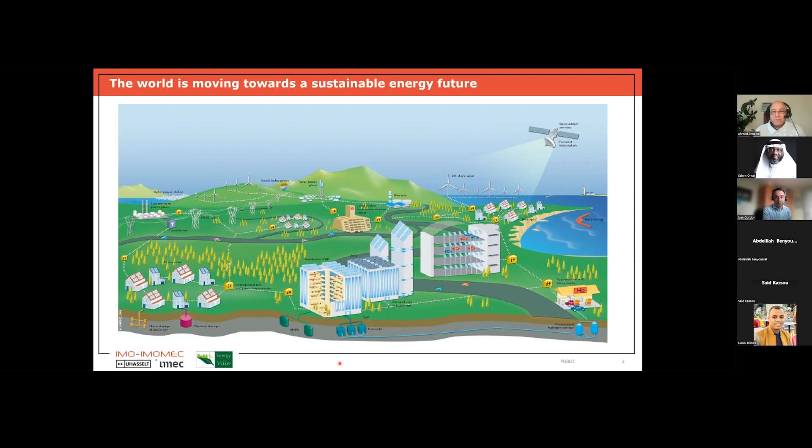Why is it happening now? Well, this transition, which is ongoing, is really happening at the moment because of the cost, which has decreased substantially over the last years and decades. If we look at photovoltaic solar energy, I show here a curve, a so-called learning curve of silicon photovoltaics. It shows you, with data starting in 1976, the evolution of the cost or price of PV modules.

The data starts in 1976. So if in the late 70s you wanted to buy PV modules, you would have to pay $100 per watt of these modules. It's a very large cost. For instance, if you had a 3 kilowatt system, 3000 watts of modules, you would have to pay $300,000. It's really huge.

Luckily today, of course, the situation is completely different. Today, the average cost for a PV module is only 23 cents per watt peak on average. That means there is a difference of almost a factor of 1,000 between 45 years ago and now.

As a result of that, what we see is that the amount of PV modules being produced each year and installed worldwide is also increasing very rapidly. In 2022, we installed worldwide in one year's time roughly 250,000 megawatts, so 250 gigawatts of PV modules. That's of course driven by the cost, and these large volumes and the cost reduction go hand in hand.

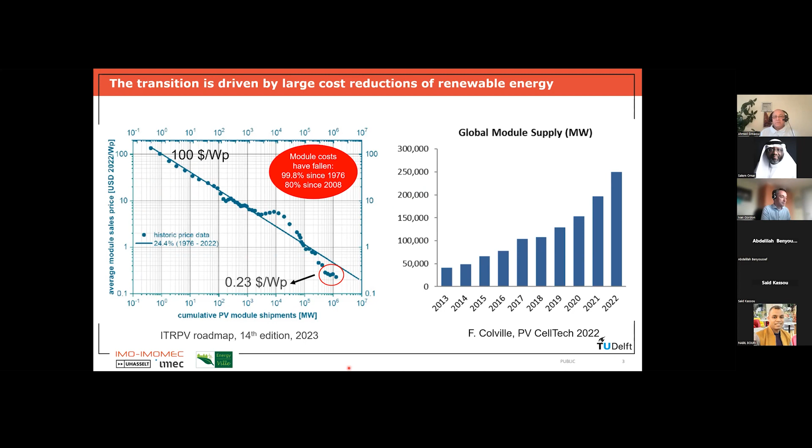What we want to achieve is to collect the electrons and holes at different sides of the device. We have two polarities in the device, an N polarity and a P polarity, negative and positive. In the best case, the electron hole pairs generated by the absorbed light are collected at these two contacts. This way, an electrical current flows and we get a voltage, so we get power - basically we convert directly the sunlight into electricity.

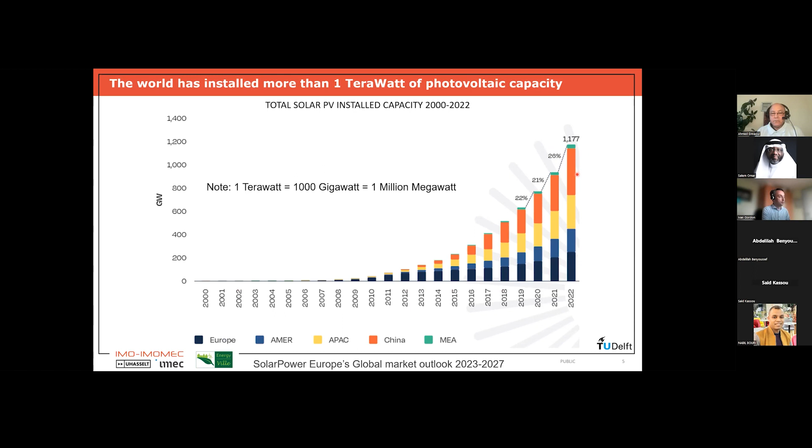If you look at the technology behind these PV modules, most are actually based on what we call crystalline silicon technology, and that will be the focus of my talk. You see in dark blue and light blue the share of silicon technology in PV modules - this is really dominating and has dominated over the years. Currently around 95% of PV modules produced and sold are based on crystalline silicon, and only 5% is based on something else, which we call in general thin film photovoltaics.

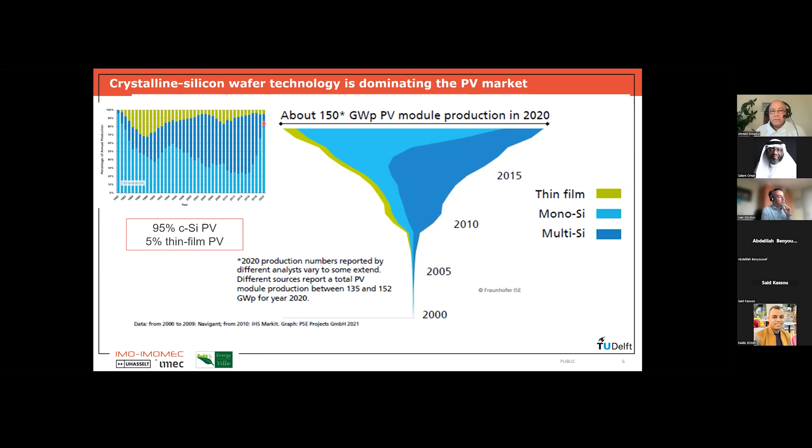This situation has evolved over time, but more or less silicon PV has always dominated. I will explain step by step what is going on in crystalline silicon photovoltaics in the remainder of the talk. I will not focus on thin film PV, but I will say a few words about it now.

If you look at the 5% of PV panels not based on crystalline silicon, they are based on different materials out there. But most thin film PV panels at the moment are based on the material cadmium telluride, a compound semiconductor. It's mostly produced in the United States by one single company called First Solar, and this technology is also quite successful. But it's based on two elements - cadmium, which is toxic, and especially tellurium, which is a quite scarce element.

That's probably also the reason why cadmium telluride will never be able to be produced in the same amounts as silicon, because it's actually quite scarce.

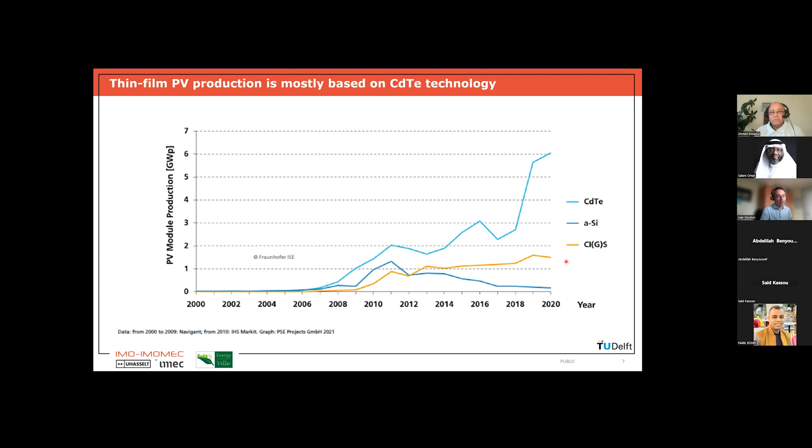Then there are some other technologies in the market. We have technologies based on amorphous silicon, but that's not really produced so much anymore because the efficiencies are too low. You also have a technology based on copper indium gallium diselenide, where several companies are still producing it today. And then there is a new upcoming technology called perovskites, which I will also discuss later in my presentation. But in this presentation, I really focus on the mainstream technology, which is crystalline silicon photovoltaics.

When we talk about crystalline silicon photovoltaics, we actually mean PV panels based on the use of crystalline silicon wafers as the absorber material.

If we look at the value chain of crystalline silicon, how we start from sand, which contains silicon, and produce a silicon PV panel, we can roughly distinguish 5 steps, which are listed here and which I will explain in the following parts.

So the first step is actually to go from sand, which contains silicon but is impure, to having very pure crystalline silicon. That's the first step. We make polysilicon, so these are, let's say, chunks of very pure crystalline silicon that we have.

In a second step, these chunks are molten and recrystallized in the form of ingots. These ingots are simply very large and heavy blocks of very pure crystalline silicon material. These ingots are then sawn into individual wafers. The individual wafers are processed into individual silicon solar cells. And then finally, these individual silicon solar cells are interconnected and laminated into the silicon PV module.

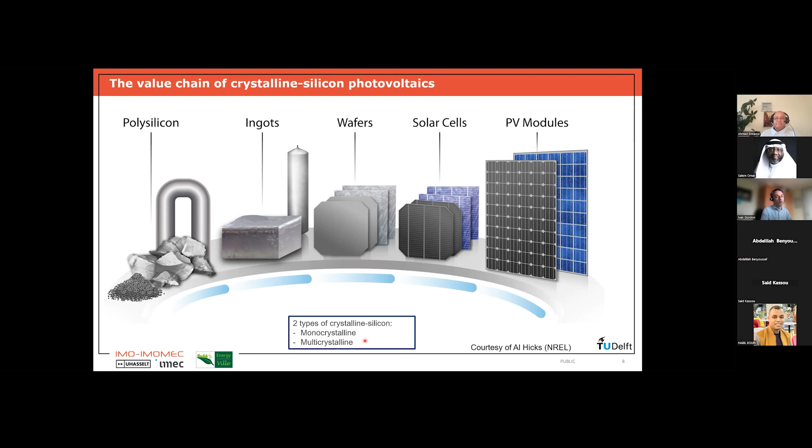But we also in the past were using so-called multicrystalline silicon wafers. These are wafers where the wafer has different crystallographic orientations, meaning you have different grains of different orientations, some grain boundaries, and typically more defects in this material. But it was used a lot in the past because we could make these multicrystalline silicon wafers cheaper than monocrystalline silicon wafers, so it made sense to use those. But I will show later that at this moment, almost no multicrystalline silicon is used anymore.

So then we can have a look at the cost structure of these modules. I mentioned in the beginning that at the moment, if you buy a silicon PV module, on average it will cost you 23 cents per watt peak. So where does the 23 cents come from?

Then another 40% is coming from the module processing, to make the module, and especially from the module materials, like the encapsulation, the glass, the backsheet. And only less than 20% of the cost is actually related to the cell processing. So we can say that the module cost is really dominated by material costs for the polysilicon especially, and also for the module level materials that we are using.

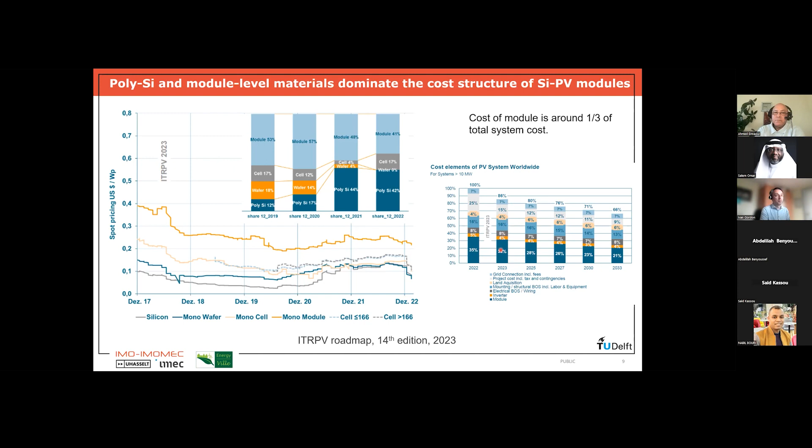Here the prediction, the dark blue, which is the percentage of the total cost of the system that is in the modules, is that it will even further decrease to below 25%. This is very important because typically the balance of system cost scales inversely with the efficiency of the modules. So if you have higher efficiency for your PV modules, then relatively speaking, the balance of system cost will be lower. The fact that the balance of system cost is dominating the total cost means there is a big pressure for using as high efficiency modules as possible to reduce the total system cost.

Now I have a few slides where I will show some important things that we now have to investigate in research and development for silicon photovoltaic. In the past years and decades, most research and development for silicon PV was focused on further increasing the efficiency of the devices and lowering the cost. And that, of course, still stays important.

But at present, we can already say that solar electricity is the cheapest electricity out there. So we already are doing very well. We can further improve it, but it's not the only thing on which we should focus anymore.

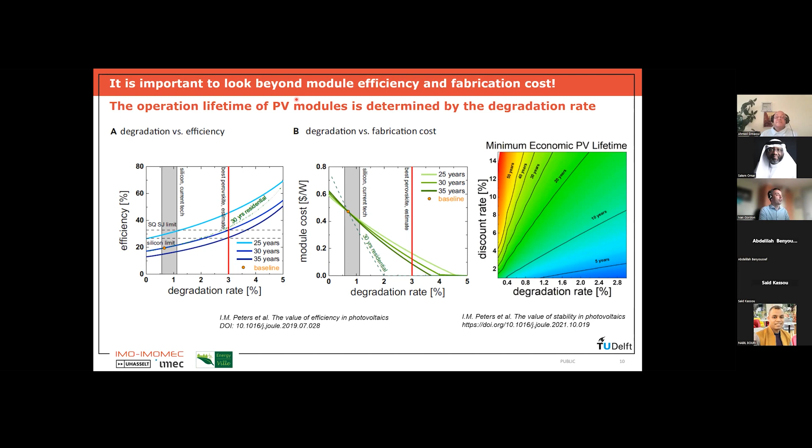So what is also important, first of all, is that we try to increase the operation lifetime of the modules further. Currently, if you buy a PV system, you typically get a 20 or 25 year operational lifetime warranty. But we probably need to further increase this to 30 to 40 years even. And each PV module that you install will have a certain degradation year after year, so it's very important to minimize the degradation rate.

This is becoming a very important field of study, especially because PV modules are used everywhere in the world under completely different climatic conditions. So if you use the same PV module in Belgium, where I'm now at, or you use it in Morocco, for instance, it will see a completely different climate during its lifetime. So you really have to tune the technology for the location and the application that you use it for.

Then secondly, we really have to focus on sustainable manufacturing. This will come back later in my story, because we will need to install a huge amount of PV modules in the coming decades. And of course, at some point all these modules will become too old and we will stop using them. So then also we need to be able to, first of all, recycle them.

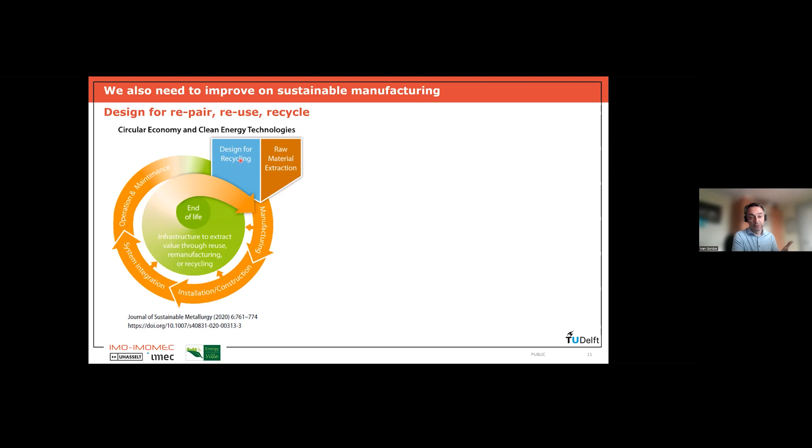We can already recycle PV modules, but we can still make a lot of progress there if we also really design the PV modules from the start for easy recyclability. Secondly, when we talk about sustainable manufacturing, we should also look at how much energy we need to produce the modules and how much greenhouse gas emissions we are making. Because again, we're going to have to produce a huge amount of these PV modules. So if we can reduce even by a few percent the greenhouse gas emission, it can have a huge impact.

Now, where does most of the energy come from, or where is most of the energy needed for? That's again actually in making the polysilicon and the wafers. We already saw before that the silicon material itself represents 40% of the module cost. But if we look at the energy demand for making a silicon PV module, we see that around two thirds of the energy that is needed is really coming from the polysilicon and the wafer production.

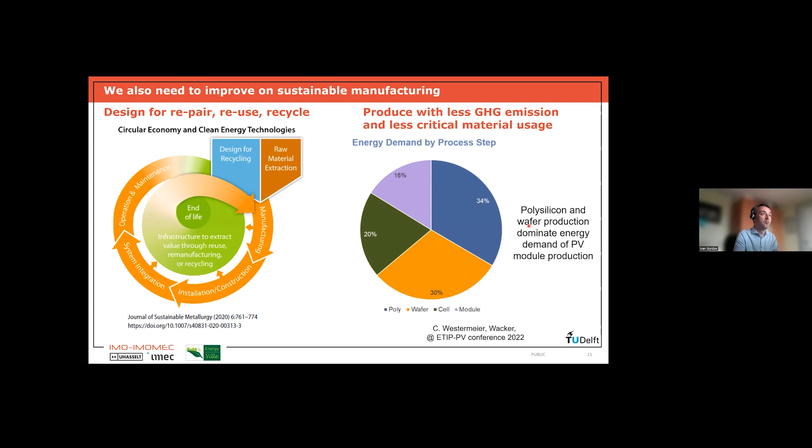So there we also still need to make big progress to reduce this, so that we will also have less greenhouse gas emissions. But I will come back to that later.

And then finally, since we are going to install a very large amount of PV systems, we also see a lot of new applications appearing, because traditionally we are placing PV systems on a roof of a house, or we put it in a large PV system somewhere in a large field. But we might not have enough space. For instance, in Western Europe, we don't have a lot of free space, so we don't always have the space to put large PV systems. That's why we actually see more and more so-called integrated PV applications appearing.

So in integrated PV applications, the PV system is really seamlessly integrated into its environment. And that can be in the building, so not just on the roof, but it can be the roof of the building, or it can be in the facade. We can integrate it in the electrical cars that we will all have in the future. We can integrate it in roads or along roads, in sound barriers, for instance. And we also see floating PV systems appearing, so on water.

And what is also investigated a lot, especially in Europe, is what we call agrivoltaic. So it's the combination of agriculture and photovoltaics, where we actually use agricultural land to produce energy, but at the same time also to have crops or even animals that use the same amount of land. So basically we have dual use of the land, and that's really good.

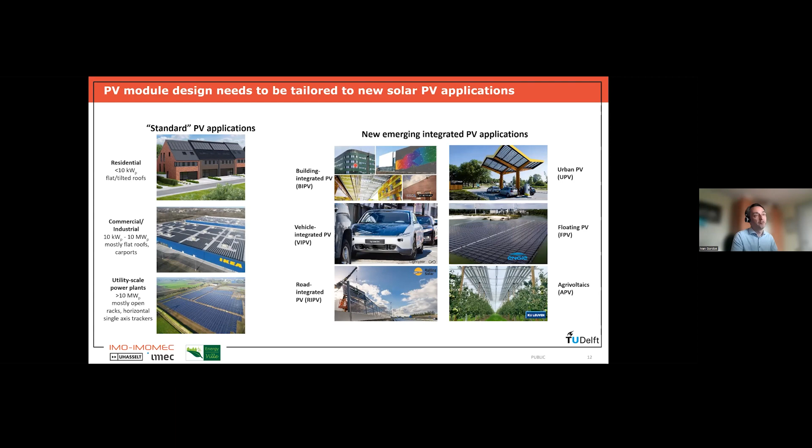Now it's clear for all these new applications, you also have to fine-tune the PV technology, because PV systems in these different environments will see completely different conditions. So for instance, if you have PV in a car, the car will move, so you will have much more dynamic shadowing. If you have PV integrated in the facade of a building, it's possible that this PV system becomes much warmer than when it's on top of a roof. So in all these cases, you have to really fine-tune the technology for the optimal performance of these new systems.

So that was a little bit an introduction. Now in the next parts, I will first walk you through the whole value chain. We will have a look at how typically the wafers are made for silicon photovoltaics. Then we will see how we can make these wafers into solar cells. And finally, how the solar cells are assembled together into a module. At the end, I will tell you a little bit about the future of silicon photovoltaics, where we will go to tandem technology. And finally, I will also highlight a few of the challenges that we have for the upscaling towards terawatt scale production of PV, and what are the challenges there to do that in a sustainable way.

But first, we will start with the silicon wafer formation. That's basically the first step in the value chain. And we know that silicon is a very abundant material, the second most abundant material in the Earth's crust. Basically, you find silicon in sand. But how can you go from the silicon that we find in sand into a crystalline silicon wafer that you can use for a highly efficient solar cell? There are many steps that we have to go through.

And so typically from sand, people can quite easily make what is called metallurgical grade silicon. This is actually silicon which has a purity of, let's say, 98%. So it's already pretty pure, but it's not pure enough for electronic applications, and definitely not pure enough for photovoltaics. So we have to make it actually more pure.

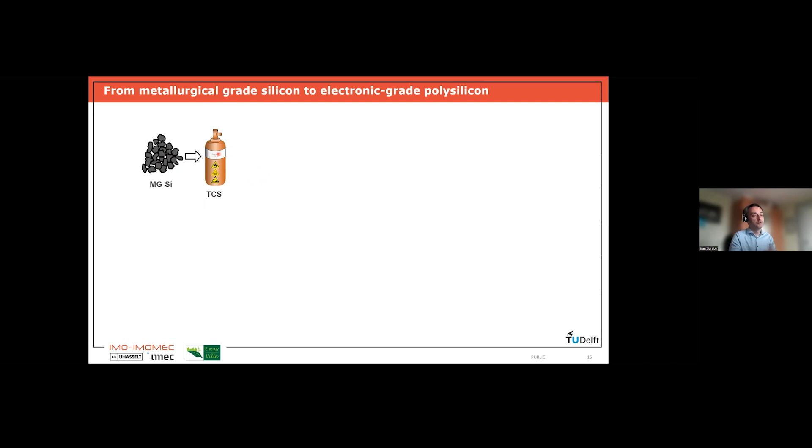We have a very pure silicon containing gas, but now we have to make this into a silicon wafer, so we need many steps to do that. The first step is to make the polysilicon material. This is done by taking a so-called, well in the standard way, a so-called Siemens reactor.

So we grow a polycrystalline silicon material that is very pure, using these silicon containing gases and also some hydrogen. Now, because we have to heat up the reactor to very high temperatures, it's a very energy intensive process, which is already one of the processes that explains why we need so much energy and why it's so costly to make this polysilicon material. So typically in the Siemens reactor, you need around 100 kilowatt hour per kilogram of silicon material that you make.

That's why there are alternatives being investigated already for quite some time, where you use slightly different processes or slightly different reactors, where you can actually reduce this amount of energy per kilogram. So this is one of the important things that we have to work on. We really have to lower the energy that we need per kilogram of silicon that we use.

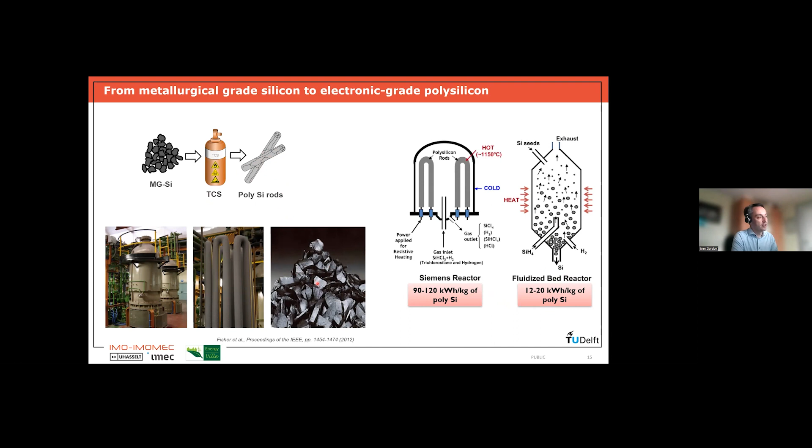So in the end, in this first step, the so-called Siemens process, we go from gas phase to actually polysilicon rods. Now, these polysilicon rods are not yet wafers, so we cannot use these rods to make solar cells. So typically what is done, these polysilicon rods are crunched into small parts, which are shown here. And then we go to the next step, which is we are going to melt these polysilicon pieces, and we are going to grow an ingot. So here I will focus on monocrystalline silicon, and for making monocrystalline silicon ingots and wafers, typically the Czochralski process is used.

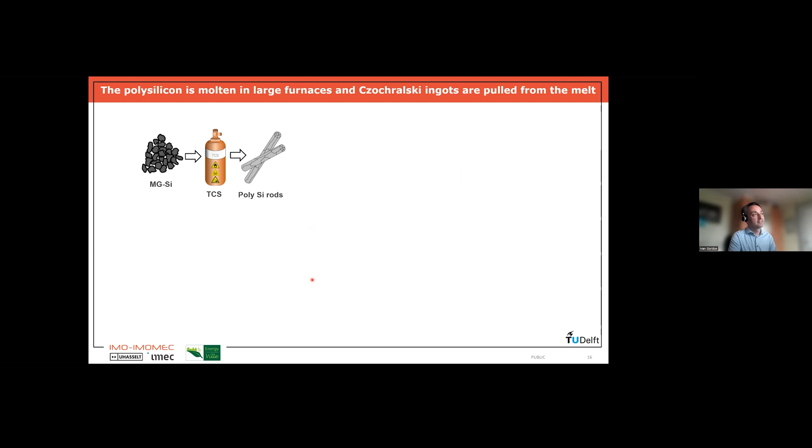That is demonstrated here. So in the end, we start from this polysilicon material, and we end up with this kind of monocrystalline silicon ingots.

So how does it work? Again, we have a reactor. In this case, we have to heat it up even higher to temperatures above 1400 degrees, which is the melting point of silicon. And we put a crucible, typically from graphite or quartz, into this reactor. The crucible is filled with these polysilicon rods that we have grown in the step before. So we heat up these crucibles to more than 1400 degrees so that the silicon is in the molten state.

And then on top of this molten silicon, we put just above it a small silicon seed crystal. This is actually a small silicon crystal that has a perfect crystallographic orientation. And by slowly pulling this silicon seed upwards, it actually pushes or pulls some of the molten silicon from the crucible with it. Once the silicon comes out of the crucible, it cools and it starts to solidify, crystallize, and it actually copies the crystal structure of the silicon seed.

And this is a very slow process. So by doing this under the right conditions and slowly pulling the silicon seed crystal higher and higher, we actually pull a whole ingot, which can be a very large and heavy piece of monocrystalline silicon out of this melt.

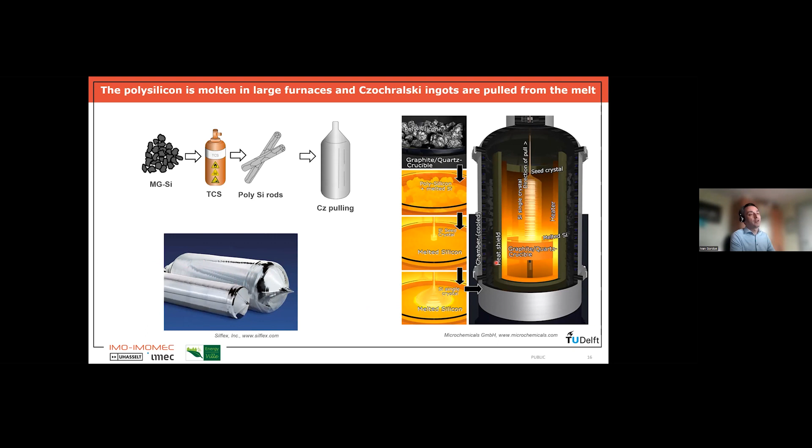Needless to say, again, because we have to use these very high temperatures and it's a very slow process, this is a very energy intensive process, which again explains the reason why we need so much energy and why it is quite costly to make these silicon wafers.

So now we have very large blocks of monocrystalline silicon, very pure, with a certain dopant profile inside that we can control. We still don't have wafers. So how are the wafers now made?

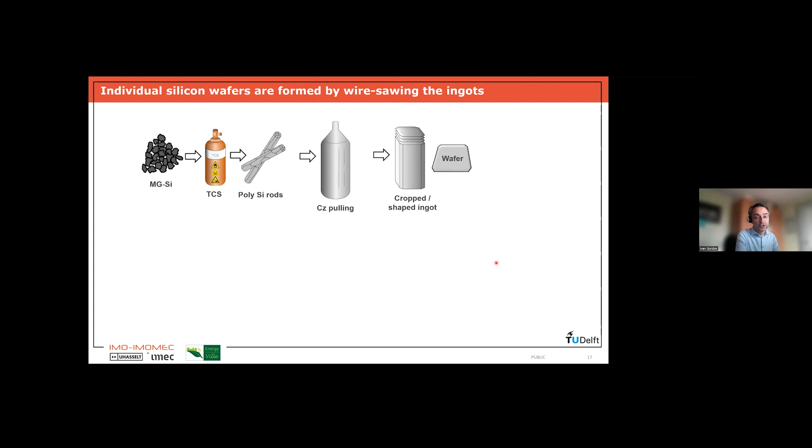Well, these blocks are actually cut into individual wafers by so-called wire sawing. So this is shown here. These days, already for many years, the wires that are used are diamond-coated metal wires. So basically, you have very small diamond materials, which are actually what cut the silicon. And this wire is very long, it can be kilometers long. And you have special machines where these wires are actually in parallel cutting a whole ingot into individual wafers.

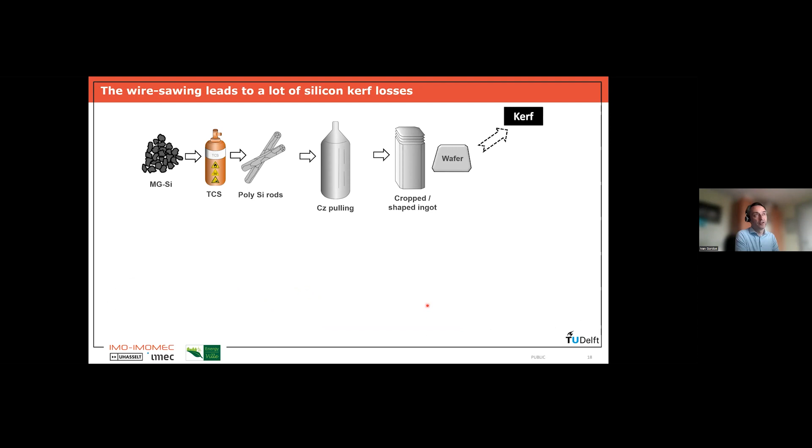Now, the problem with this process is that it leads to a lot of silicon kerf losses, so we lose part of the ingot. Why is that? These wires have a certain dimension, typically around 80 to 100 micrometers in width. We cannot make them too thin because then the wire can easily break. These wires cut through the silicon, but everywhere they cut, they pulverize the silicon ingot. So after cutting, you have a wafer with a certain thickness, determined by the distance between two wires. Typically, wafers used in industry are around 180 micrometers thick. But where the wire was cutting, you typically lose around 100 micrometers of silicon in the form of kerf losses.

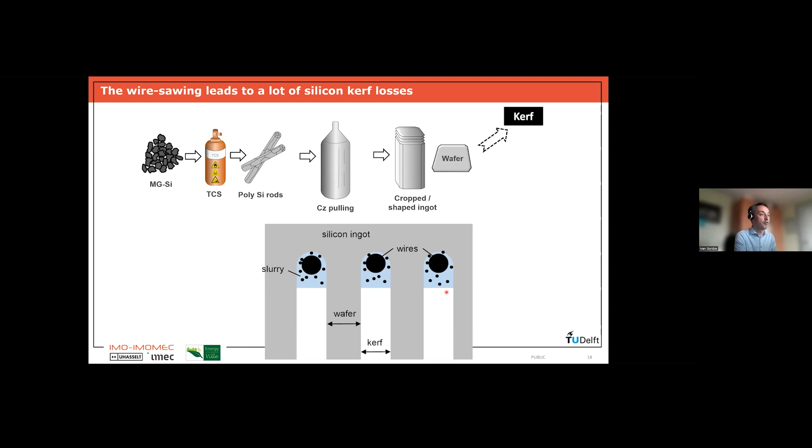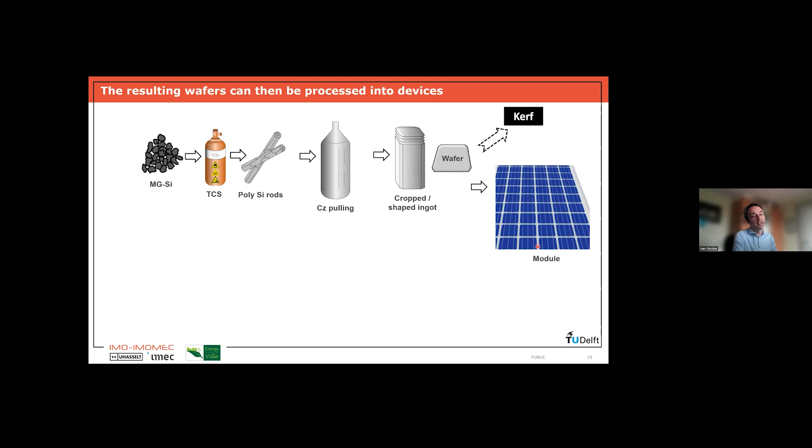So after all these steps, we finally have wafers that are high quality and can be used to make solar cells and modules. If we summarize this, this typical way of making silicon wafers involves a lot of energy intensive and expensive processes. On top of that, we also lose a large percentage of the ingot again during that wafering. All of this is responsible for the fact that the energy payback time and CO2 footprint of silicon photovoltaics is still relatively high. It also explains why the cost of the silicon PV module is 40% dependent on the wafer cost. So there is still lots of room for improvement here.

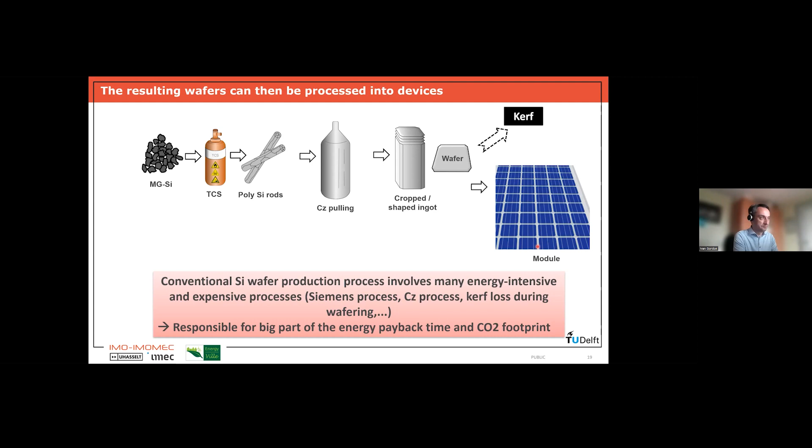Now I will go to a few recent developments in these silicon wafers used for photovoltaics. The first development, which took place very quickly in the last 2-3 years, is that the wafer size has increased a lot. So I would call it big is beautiful somehow. For 10 to 15 years, the silicon wafers used in the PV industry always had the same size. They were square or semi-square wafers of 6-inch length, more or less what you see here. You had a square wafer with sides around 156 millimeters.

There were two reasons why the wafer size has increased. There have been quite some improvements in the whole process I just explained, making it possible to make larger wafers. These larger wafers and larger ingots typically also reduce the cost. So it's really from a cost perspective that people have started making larger wafers. The sizes now being used go from the original 156 millimeters all the way to square wafers, which we call G12, of 210 by 210 millimeters. If you look at the area of such a wafer, it's 80% larger than the original wafers we used to use.

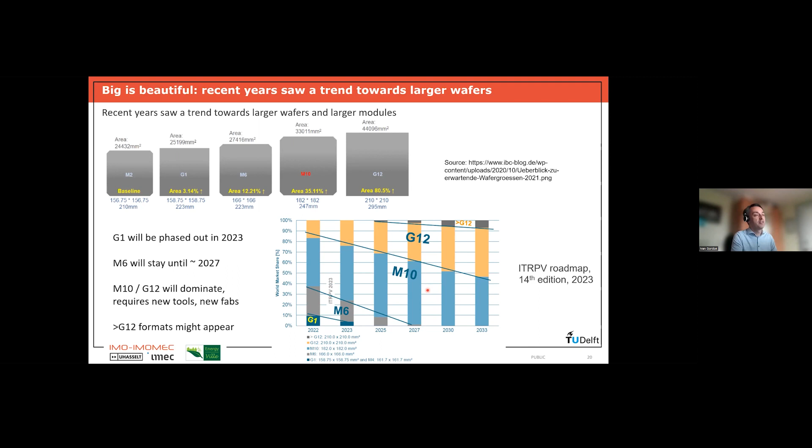Now, going to larger wafer sizes is very inconvenient in a certain way for everybody, not just the industry, but also research institutes, because you have to change or upgrade all your systems. You are used to working with a certain wafer size, and all of a sudden you cannot get those wafers anymore. You have to use much larger wafers. So it's possible that your tools are not equipped or cannot be used for that, and then you have to invest in new tools or upgrades of your tools.

At this moment, almost the whole production of silicon photovoltaics is using monocrystalline silicon wafers. Until about 5 years ago, the majority of solar cells were based on multicrystalline silicon, because multicrystalline wafers were a lot cheaper than monocrystalline ones. Although the efficiency achievable with multicrystalline silicon was lower, it was still competitive.

But these days there are two evolutions. First, monocrystalline silicon wafers are almost the same price as multicrystalline, so there's no price difference anymore. Secondly, the balance of system cost is becoming more and more important, so it's really important to lower cost at the system level to have high efficiency solar cells and modules. This you can only achieve if you use monocrystalline silicon.

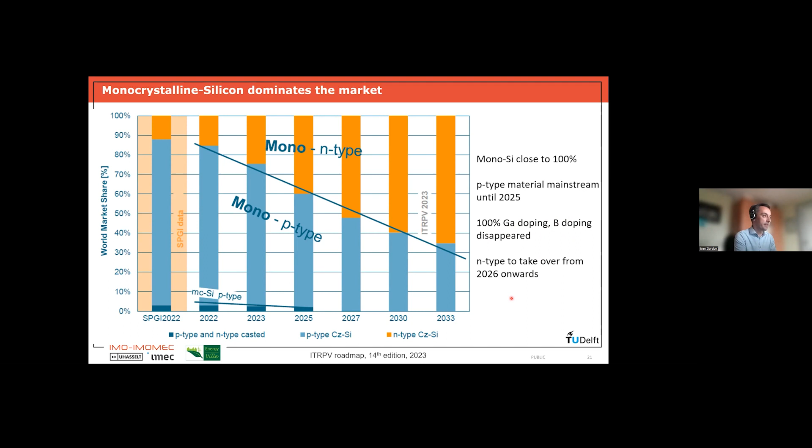So now we have seen a little bit about how silicon wafers are made. Next, we process the wafers into solar cells. How is this typically done? I'll give a bit of historical explanation of how this was done and how it's changing over time.

You typically have a P-type silicon wafer as a starting point, which can be multi or monocrystalline. At the front, you have an N-type emitter, so you have a P-N junction needed to separate electrons and holes. The front surface is typically textured with random pyramids so that you have lower reflection and better light coupling. Then at the front you have a silicon nitride layer that acts as an anti-reflection coating and also as a passivation layer for the front surface.

You also have metal contacts, typically silver at the front. At the rear, you have aluminium as the metal contact, and an aluminium silicon alloy that forms a back surface field. This feature gives the device its name: aluminium BSF.

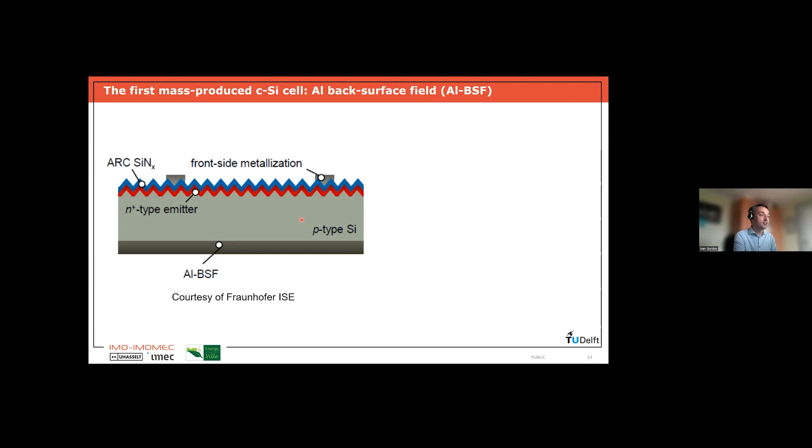This is a relatively simple cell structure, but you can still reach relatively high efficiencies with it. It was very successful in the industry for many years, especially because it's very easy to process—you don't need a lot of process steps, which makes it very interesting for industry to mass produce.

Typically, you need to texture the wafer—that's one step. You have to diffuse phosphorus inside the wafer at the front so that you have the PN junction. The phosphorus is also typically diffused at the sides and partially at the rear, so you have to remove it again—that's the parasitic junction removal. Then you grow the silicon nitride layer at the front using plasma enhanced CVD. Then you use screen printing of silver metal at the front and aluminium metal at the rear, and finally do a high temperature firing step.

So you put the wafer into a furnace at high temperatures for a short time so that you form very good ohmic contacts on the front and rear. Also during this high temperature firing step, you form this aluminium silicon alloy, the aluminium back surface field.

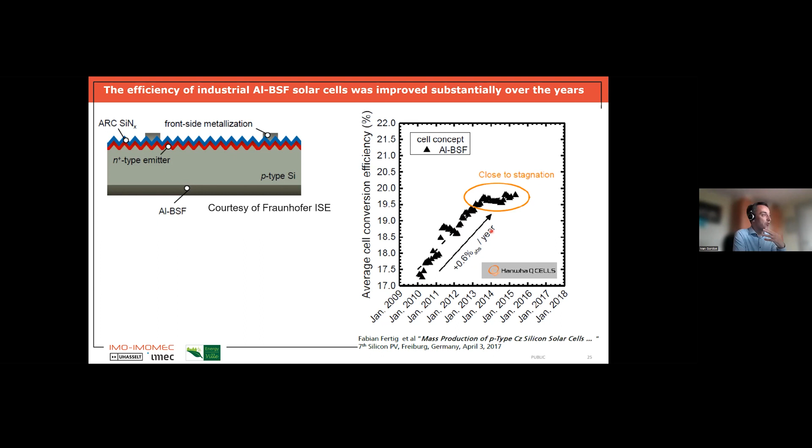That is, at the rear of the device, the whole silicon surface is in direct contact with the aluminium, so you have a lot of recombination. A lot of the minority carriers will recombine at this rear surface. So basically the name of the device, aluminium back surface field, is also the weak point of the device. If you want to go to higher efficiencies than 20%, you can do whatever you want on the other parts of the device, but this will really be the dominating loss.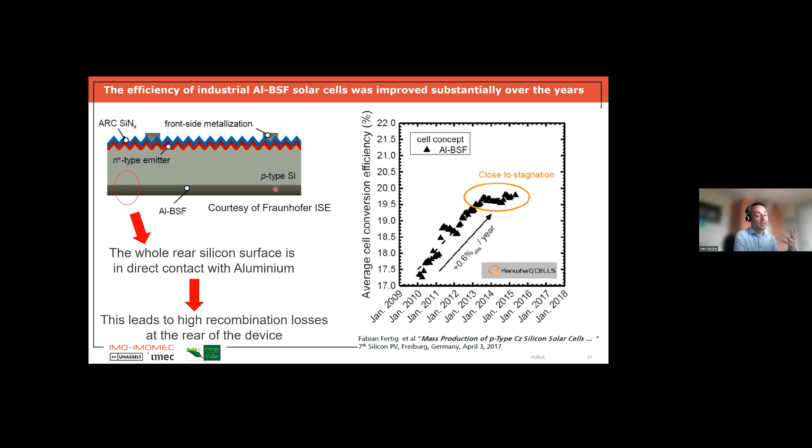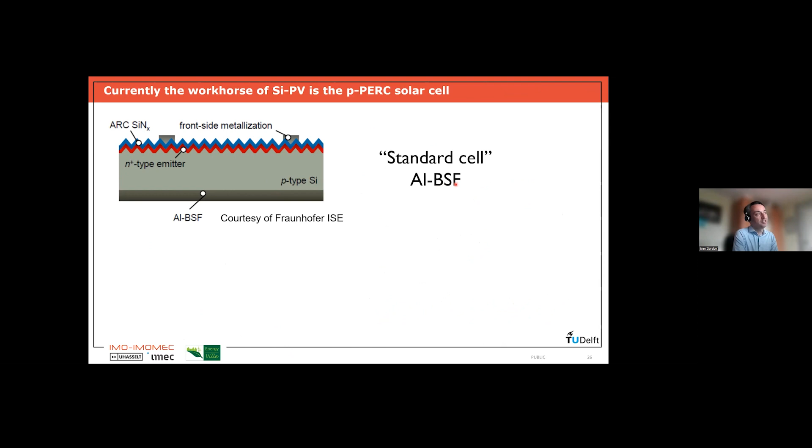So you really have to solve this rear surface passivation problem, and this is what we have done in the meantime. If you look at the industry now, almost nobody is producing these aluminium BSF cells anymore. Everybody is now producing so-called PERC cells, which stands for passivated emitter and rear cell.

I just compare the cell structures here. The front of the device is more or less identical, the difference is at the rear. In the case of the aluminium BSF, the silicon surface was completely covered by aluminium everywhere. But in the PERC cell, we have inserted this blue layer, which is typically a dielectric layer, that serves as a passivation layer between the aluminium and the silicon.

But of course we still need metal contacts, ohmic contacts, so a few percent of the surface is still in contact with the silicon. We make local openings in the dielectric for a few percent of the surface area so that we can have local metal contacts. This solves a lot of the problem we had in the aluminium BSF cell of rear surface recombination losses.

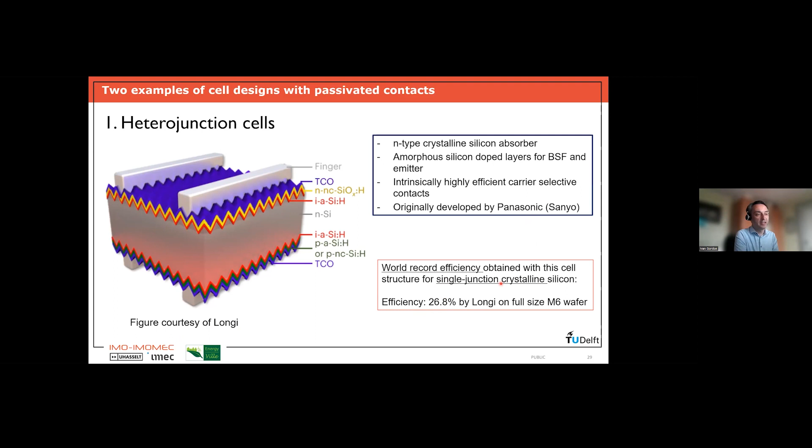This is actually the world record efficiency currently for a single junction crystalline silicon cell, the best silicon solar cell we have ever made: 26.8%. That's quite a lot, and clearly higher than what we can achieve with the PERC cell.

A second, more conventional passivated contact cell concept is called TOPCon. There are different names for it; TOPCon is the name given by Fraunhofer ISE. TOPCon stands for tunnel oxide passivated contact. This cell concept again uses N-type silicon, but looks more similar to the aluminium BSF and PERC cells we've seen before. The front is similar to the PERC cell, but the main differences are at the rear.

Typically at the rear, the silicon surface is passivated with a thin oxide layer, which we call a tunnel oxide because the current has to tunnel through it. On top of that oxide, we have a doped silicon thin film, typically a doped polysilicon film, that gives you a surface field.

This is also an example of a passivated contact, which is carrier selective. The tunnel oxide is typically used for surface passivation, to reduce the dangling bonds at the surface. The doped polycrystalline silicon layer is then used for selectivity.

This cell concept was originally developed by Fraunhofer ISE, but many companies and institutes have also made variations of this. At the moment, the highest cell efficiency achieved for this type of cell is 26.7%, very close to the 26.8 we saw. This was also achieved on large wafers by a Chinese company, in this case Jolywood. So you see, the heterojunction and the TOPCon cell both lead to efficiencies almost of 27%, but these are, of course, the champion cells from the lab.

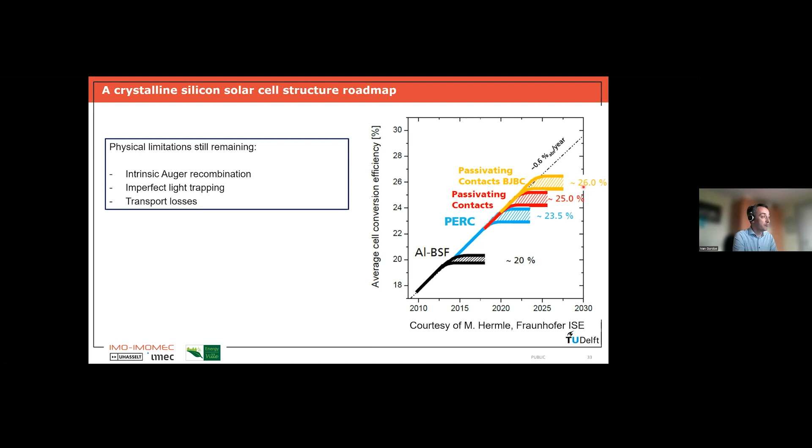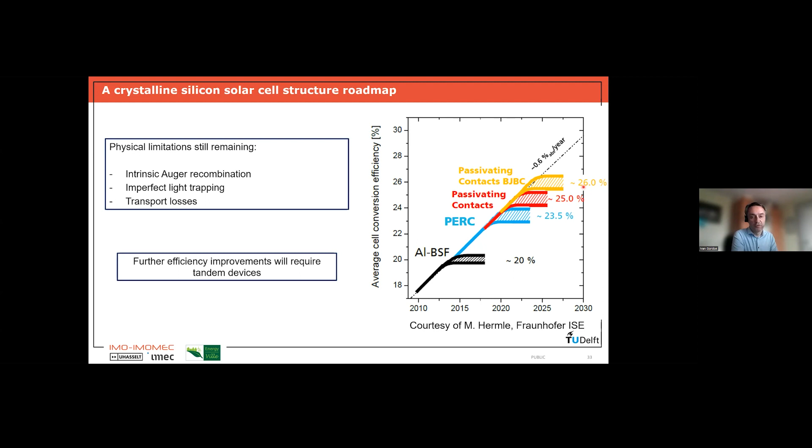And then, of course, you can still try to further increase it, but it will become very, very difficult. I will explain that later in another section. To even go higher than this in efficiency, we will really need to completely rethink our strategy, and we will have to go for so-called tandem devices. But this I will explain later.

So now, again, I will show you a few of the evolutions that are expected. First, I've shown you many different cell concepts. So what is the industry now producing?

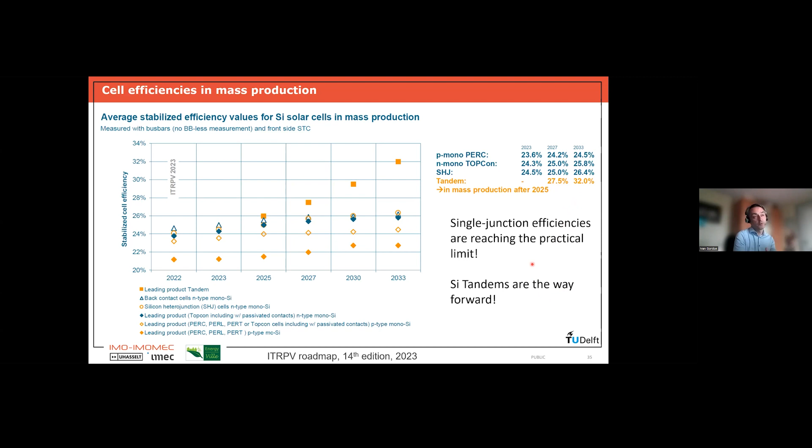For the tandems, which I will explain later, these are still being developed and not yet in mass production. But in the long run, the idea is that this will allow us to go even much higher in efficiency. So silicon tandems are really the way forward, also how the industry sees it. These single junction efficiencies for silicon, close to 26%, are really more or less the practical limit of what we can achieve. That's why we need these silicon tandems to go even further.

So now we have seen different cell concepts. Now I will say a few words about how these cells are interconnected and laminated into a module. Of course there are many different module processes. I will focus here on the standard process, and show a few extra things which are done.

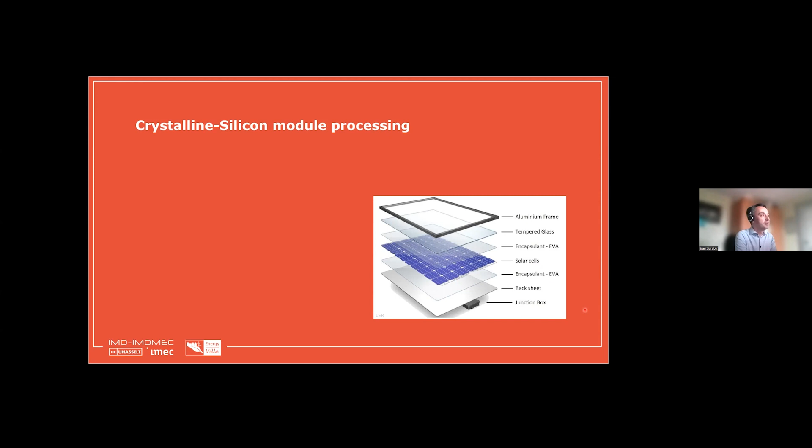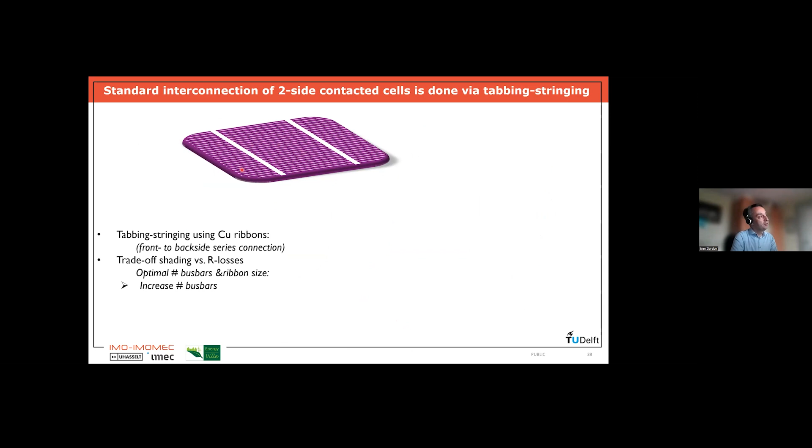So how are we now going to interconnect these wafers? You see here the first wafer, the front of the wafer, with 2 bus bars, and we are going to solder on top of these bus bars so-called copper ribbons. These ribbons are made from copper, typically a few millimeters wide and a few hundred micrometers thick, with a coating which makes them solderable.

These copper ribbons are soldered on top of the contacts of the first cell, at the front. We call this process tabbing and stringing. Then we take a second cell, and these same copper ribbons are soldered to the rear contacts of the second cell. In this way, we have connected the front polarity of the first cell with the rear polarity of the second cell.

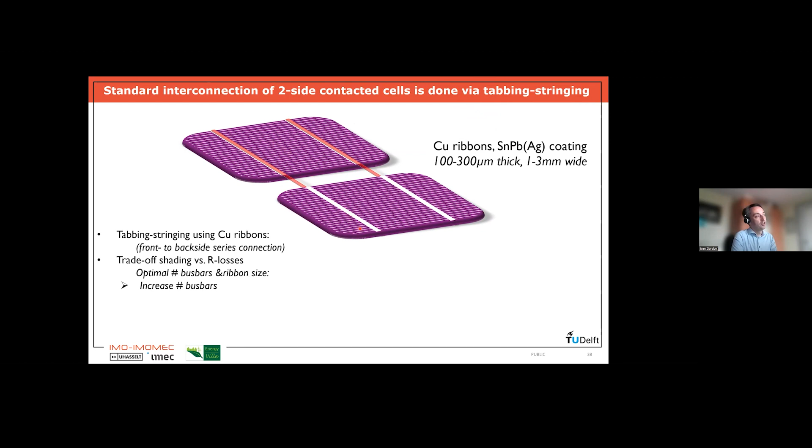So these 2 cells will now be connected in series. And of course, we can continue like this. We can now connect the second cell with a third cell and so on. And of course, we have here an interplay

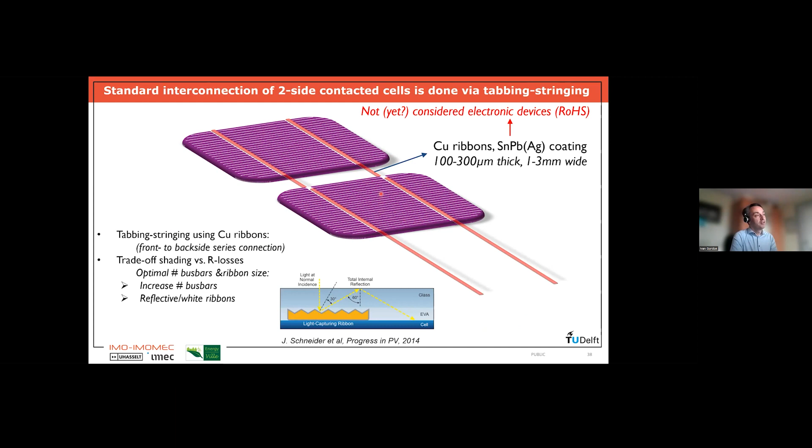between resistivity and optics. From a resistivity point of view, it would be better to have more bus bars and wider bus bars so that you lower the resistivity of the contacts. But from an optical point of view, everywhere you have a bus bar you actually lose light that cannot enter the device. So from an optical point of view, you want to have as little bus bars as possible and as small bus bars as possible.

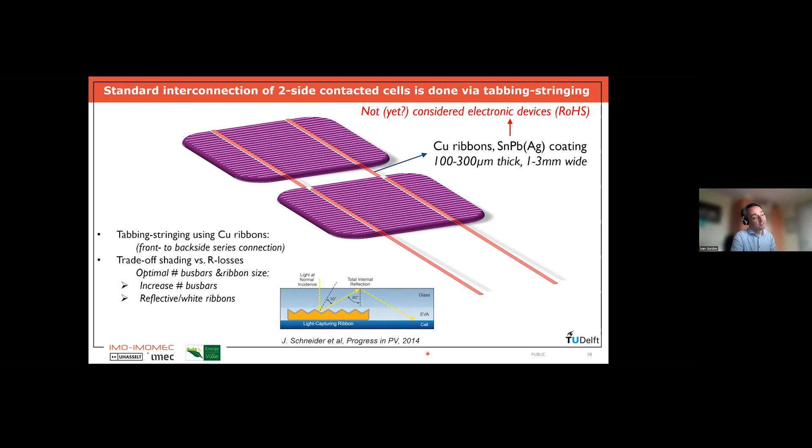Of course, there are tricks. Sometimes these ribbons are made in such a way that they can reflect some of the light, which then still can enter the cell somewhere else.

So now let's see how we actually make the module assembly. What is the layout of the traditional module? We start with the module glass. You start with a glass, which typically has a thickness of 3 millimeters and needs to be very transparent. This will be the front of the module in the end.

On top of that glass, we put an encapsulant to protect the cells against moisture ingress and other things. The encapsulant traditionally is made of EVA, a specific material, but there are many other materials being used at present already. And then we are going to put a string of cells on top of this encapsulant.

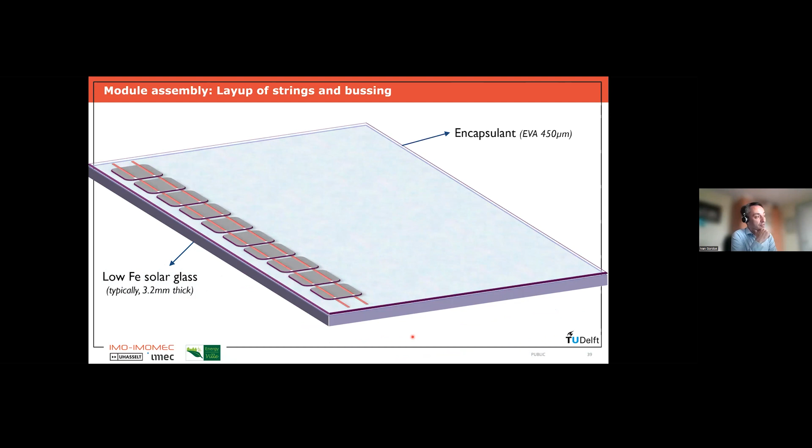In this example, I give the example of the traditional 60 cell module. It will be a module that consists of 60 cells. You see here one string of 10 cells, which have been soldered together, so these are 10 cells, all connected in series. And we put 6 of these strings next to each other, so in total this is 6 times 10, 60 cells.

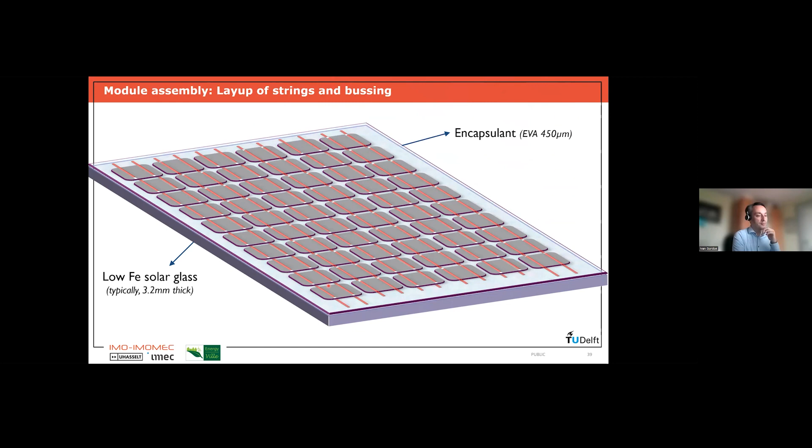Then in the next step, we are going to connect these 60 cells, these 6 strings, by large copper tabs. We call that bussing. After this is done, we basically have 60 cells, and these 60 cells are all series connected. So it's one big snake, you could call it, of cells that are in series connected.

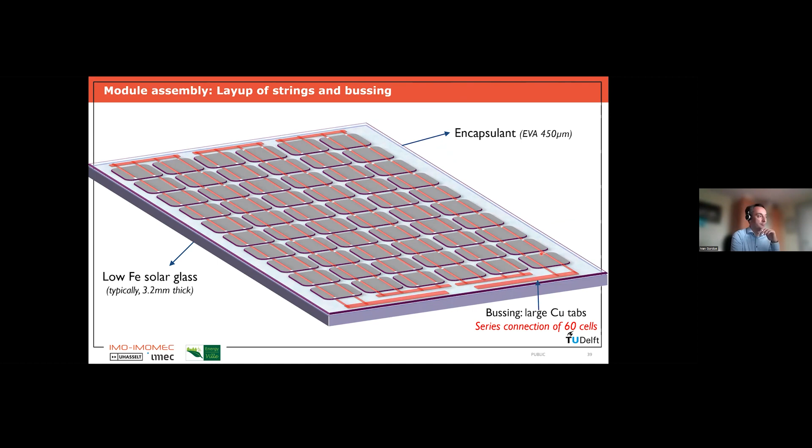Then we put also on the other side an encapsulant, so our 60 cells are now sandwiched between 2 layers of encapsulant. We of course have to make sure that we can get the current out of this, so we have some connection through the encapsulant with the outside world.

For further protection at the rear, we put a backsheet. This backsheet typically consists of different materials, again to protect against moisture ingress, oxygen, etc. You can have different backsheets - a white backsheet for reflection, or a transparent backsheet if you want to have a bifacial module. So there are different variations.

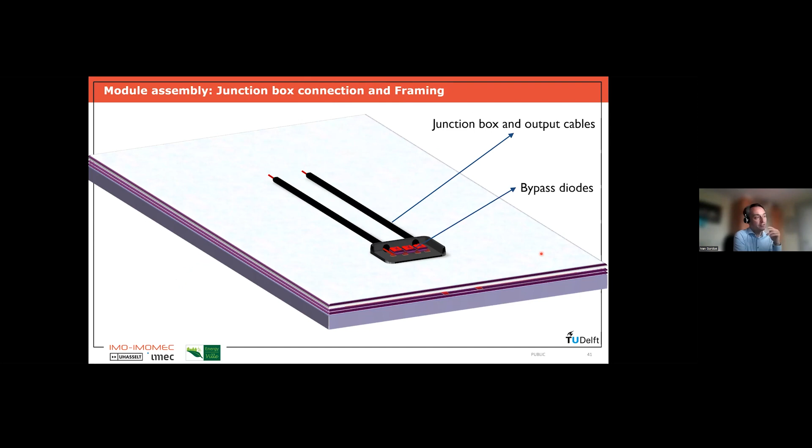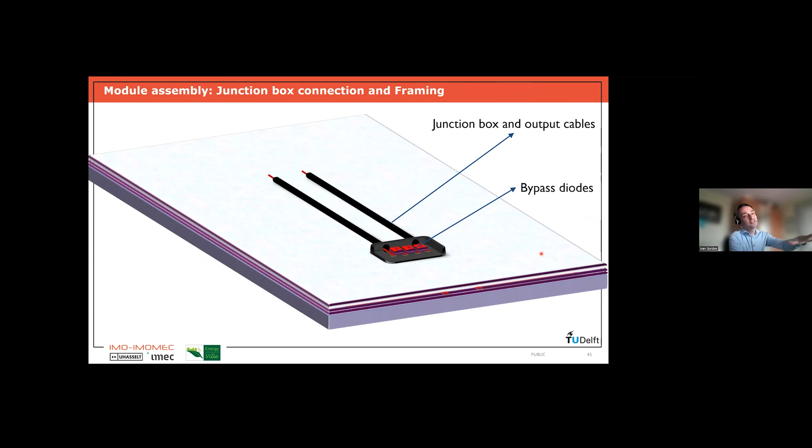Then the junction box is placed with output cables and bypass diodes. And finally, what I forgot to say before, we have to laminate everything together. Once the backsheet is there, it's put into a laminator so that everything is fixed. Then, many of the modules still have an aluminum frame around them for further protection. So this is actually how the cells are interconnected and then laminated together into a PV module.

So this is a classical process. There are, of course, many variations on this. If you use back contact cells, you have to use a different approach. I will now, for 2-side contacted cells, give you a few of the alternatives.

One alternative is what is called multi-busbar soldering. It's more or less the same as what I've shown you, but because we have now very large wafers, often these wafers have 9 to 12 bus bars, but the bus bars are very, very narrow - otherwise we lose too much light. Then you have to use very narrow wires or very narrow ribbons, but the principle is more or less the same. This is done a lot.

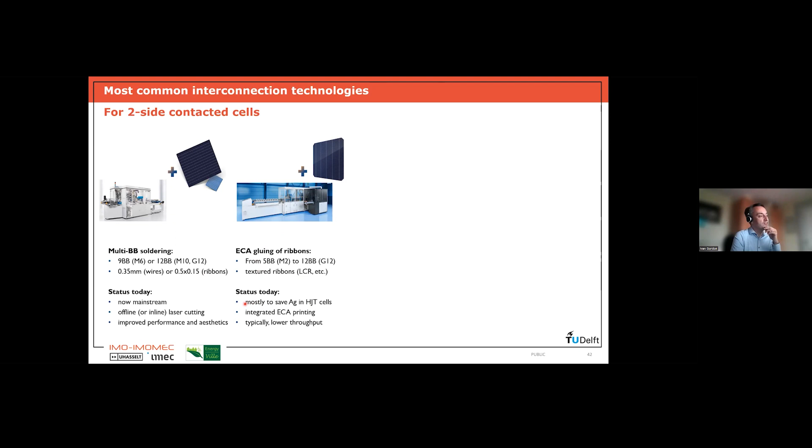Another alternative is, instead of soldering, you can also use electrically conductive adhesives - gluing instead of soldering the ribbons to the bus bars. This is interesting for heterojunction cells, which cannot withstand very high temperatures because high temperatures damage the cells. There you perhaps don't want to go to high temperature soldering, but you can use these electrically conductive adhesives to glue the ribbons.

Another approach, which is completely different, is so-called shingling. Here we cut the cell into elongated strips, and the interconnection is done like the shingles on a roof, connecting one shingle on the side with the next, with a small overlap of about 1 millimeter between neighboring shingles. This leads to very close packing and also a much better look, so the aesthetics are better. For building-integrated applications, this is really nice.

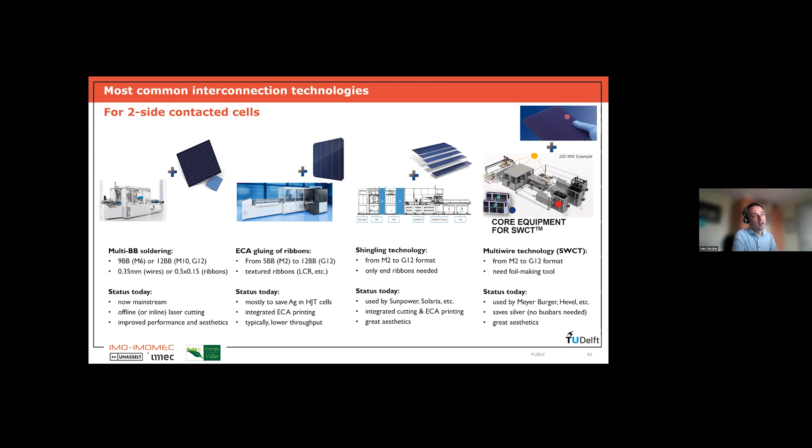Something else that is also being done is so-called multi-wire technology, for instance like Meyer Burger is doing. Here you don't need bus bars on the cells, just the fingers. You use a foil which contains wires to interconnect neighboring cells, and that gives a very even look. You don't see the bus bars and copper ribbons anymore because they are not there, so it gives great aesthetics and also saves some silver. It's a very interesting approach.

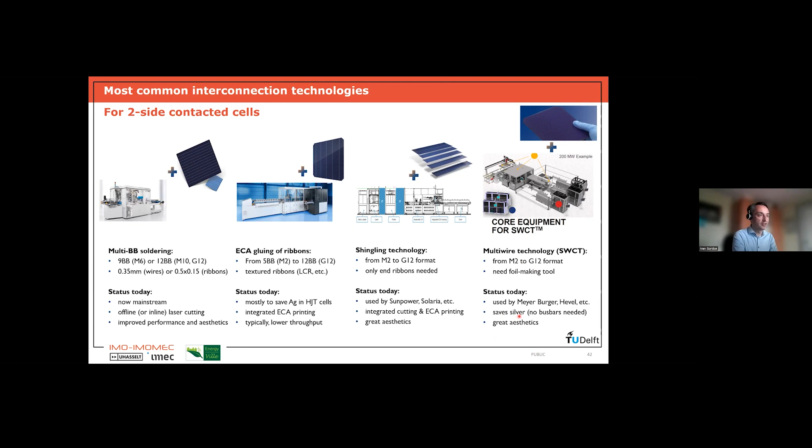Now, some evolution in the modules. The module size has increased a lot because, of course, the wafers have increased. If you make a 60-cell module with wafers of 156 millimeters, versus wafers of 210 millimeters, it's going to be a huge difference. Where in the past PV modules were typically 1 meter wide and perhaps 1.6 to 1.7 meters long, we now see modules which are much longer, say 2.4 meters, and also much wider because they use much larger cells. That also means not only the efficiency of modules has increased, but especially because of the size, the output of the modules has really drastically increased.

In the past, we had typically modules with, let's say, 400 watts of power, but now the largest modules can easily have up to 700 watts for just one single module. But of course these very large modules become very heavy, so probably we cannot make modules much larger than this anymore, because then they become too heavy and difficult to handle.

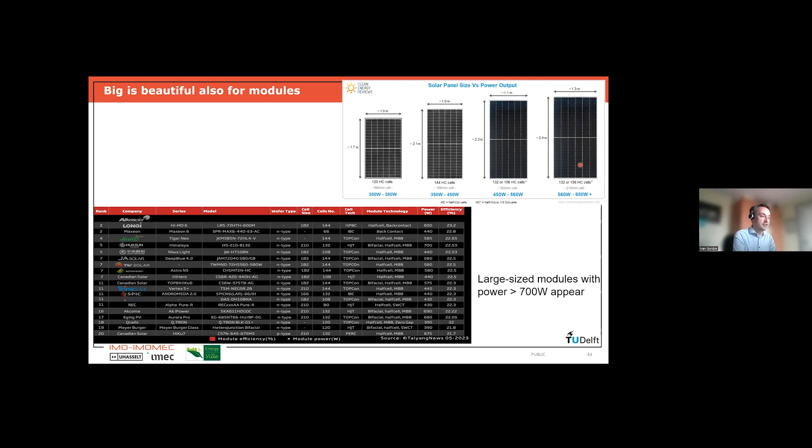One thing I should also mention is that because we now use very large wafers, such a large wafer generates a very large current. This is not so good because the current generated by the cell needs to be transported to the outside world, and if you have a very large current, you might have a lot of resistive losses.

That's why most modules made today are based on so-called half cells. The large wafer is made into a solar cell, but before the solar cells are put into the modules, they are cut into two half cells. The half cell produces only half the current, and this is a big advantage. You still have the same number of cells in your module, but by cutting them in half you reduce the current by a factor of 2 and gain a lot in efficiency because you have much less resistive losses. In the future, it's even expected that cells will be cut into even smaller parts, which is already done for the shingling technology, by the way.

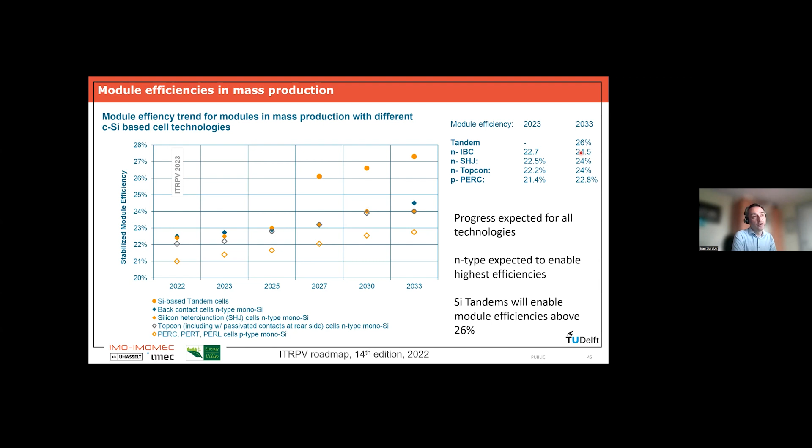And then finally, the module efficiencies. These are the best-in-class module efficiencies we have today. We see for PERC, we are around 21.5% module efficiency. For passivated contacts, it's above 22%, and the highest module efficiencies are typically for IBC modules, for instance the SunPower ones, which have efficiencies of close to 23%. Again, in the next 10 years, a lot of progress is expected for all the technologies, but in the end the module efficiencies for single junction devices will be limited to 24.5%, perhaps 25%. If we want to go higher than that, we will need to go to silicon tandems.

Now, I've mentioned these silicon tandems many times, so now I will explain what we mean by that. If we go back to a single junction silicon solar cell, we can calculate that the theoretical efficiency limit of such a device is 29.4%, more or less.

So what does that mean? It means theoretically, we can never make a single junction silicon solar cell that has a higher efficiency than 29.4%. And of course, practically speaking, it will also be impossible to reach this 29.4%. So the practical limit is probably 27 point something even. Now 29.4% as such is not so very high, I would say.

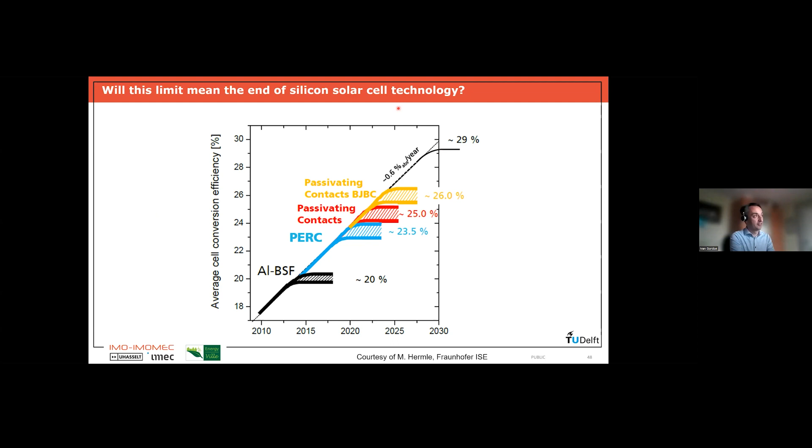So a crystalline silicon-based tandem or a multi-junction will allow to push the efficiencies above 30%. What is the idea behind it? We're going to use a silicon solar cell and place another cell on top of that. This top cell needs to have a higher band gap.

And this will allow in the end to have such two cells on top of each other, which we call a tandem, to have a tandem device that has a higher efficiency. And we can calculate what are the theoretical efficiency limits for such tandems. It depends strongly on the band gap of the materials, so you have to select two materials to put on top of each other which have matching band gaps.

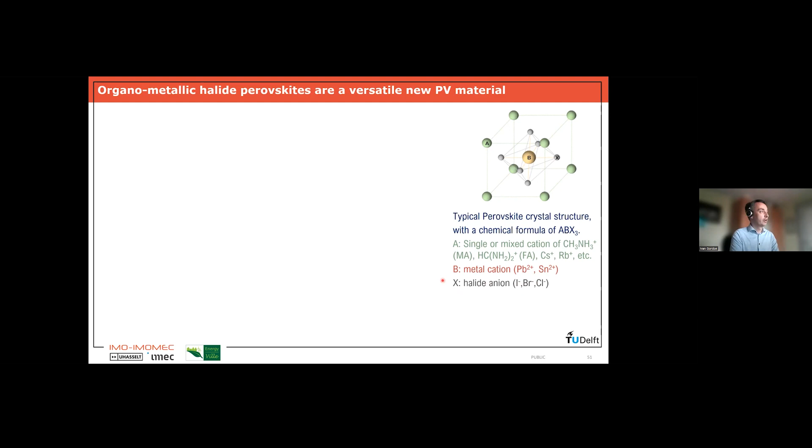Now, what are some of the features that make this material very successful? First of all, you can fabricate it very simply - solution-based processes are possible, also possible by thermal co-evaporation growth. That means you have inexpensive ways of growing the material. Moreover, you don't need a lot of it - only 100 nanometers to make a good device. And it's an inexpensive material consisting of abundant materials, which makes it very interesting from a cost perspective.

The silicon and the perovskite can be combined in a tandem structure in different ways. I'll show you here the three main architectures. The first one is called the two-terminal approach. In a two-terminal approach, you grow the top cell, the perovskite, on top of the bottom cell. We call it two-terminal because in the end, like in a regular single junction cell, you have a top contact and a back contact.

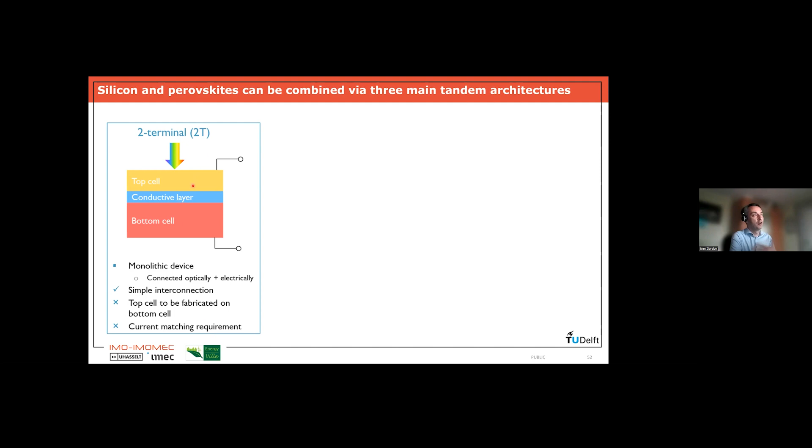Finally, the two cells are also series connected, so you need to have current matching. And of course, in real life, we know that the spectrum of the light is changing continuously over the day and over the seasons, so this is not so easy to deal with.

On the other side, you have four-terminal devices. In a four-terminal device, you actually grow the top cell and the bottom cell independently from each other, and then you just mechanically stack them on top of each other. The advantage here is that you have independent fabrication and optimization of the two cells, so you have no limitations there. They are also not in series connected.

So you don't care about current matching or spectral variation - it doesn't matter if the two cells have a different current. But it's called four-terminal because you basically have two devices on top of each other, and each device has a top and a bottom contact, so you have four contacts in total. That means to put it into a module, it's much more complicated and you need more power electronics, which can make it more expensive.

And of course, you have to put these two on top of each other. You need to have some optical coupling layer. And typically, this can also lead to more optical losses, more parasitic absorption.

And then there is a middle way, of course, where we actually do three terminals. So here you still have a monolithic device like the two-terminal. You grow the top cell on top of the bottom cell. But now you have not just a top contact and a bottom contact, you have a second bottom contact for the bottom cell. And this allows actually, in case you don't have current matching, because the two devices are in principle connected in series, you don't lose part of the current. You can actually extract it via this third contact.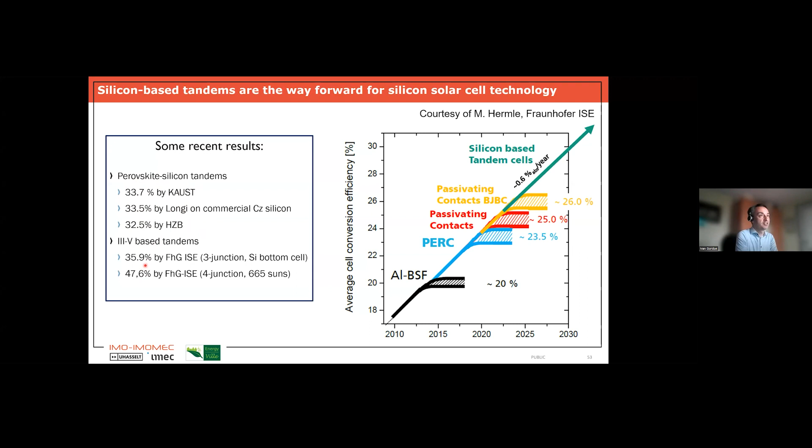So that brings me then to the final part, where I will say a few words about the challenges that we face for sustainable manufacturing at terawatt scale. So what is this about?

So we have seen that in 2022, we reached this milestone of 1 terawatt of PV modules worldwide installed. But if we want to become climate neutral by 2050, we need much more than 1 terawatt. How much exactly we need in terms of PV depends a little bit on the assumptions you take. There are different models, but typically we can say, like in this model, that we probably need around 50 to 60 times more PV installed and operational than what we have today.

So if we want to achieve 50 or 60 terawatt peak of PV modules by 2050, we only have 30 years left or even less. That means from now on, we should start producing more than 1 terawatt peak, 1 to 3 terawatt peak per year, to actually achieve this 50 to 60 terawatt installed. Now in 2022, we only made 250 to 300. The exact number is not so clear, but we are far below what we need to install year by year to reach these numbers.

So that means the annual production needs to increase probably by a factor of 10 in the coming years and decades. And this is very challenging, especially from a material point of view.

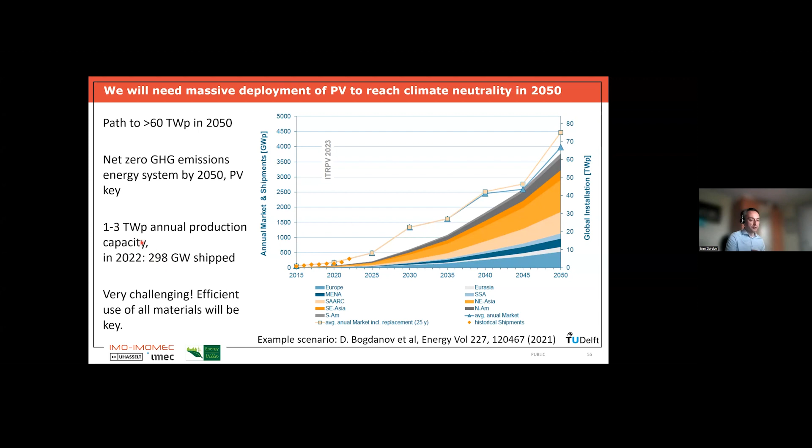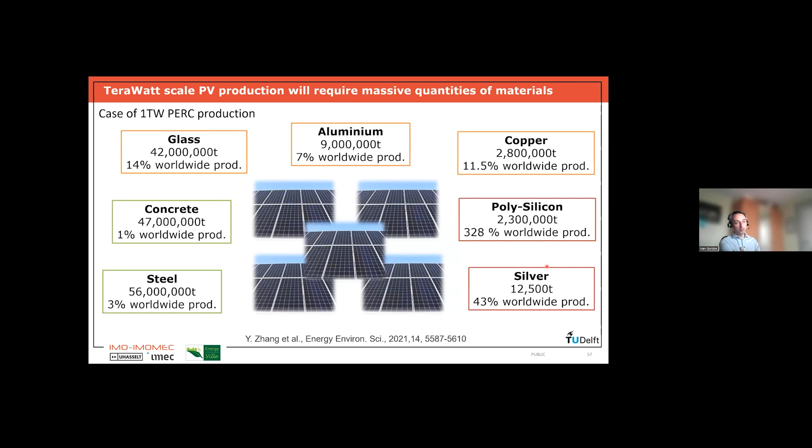Now, if we want to produce 1 terawatt of these modules, which is the minimum we will have to do, it's roughly 5 times more. So we need 5 times more of all these materials, which for silver would mean that we are already around 43% of the worldwide production.

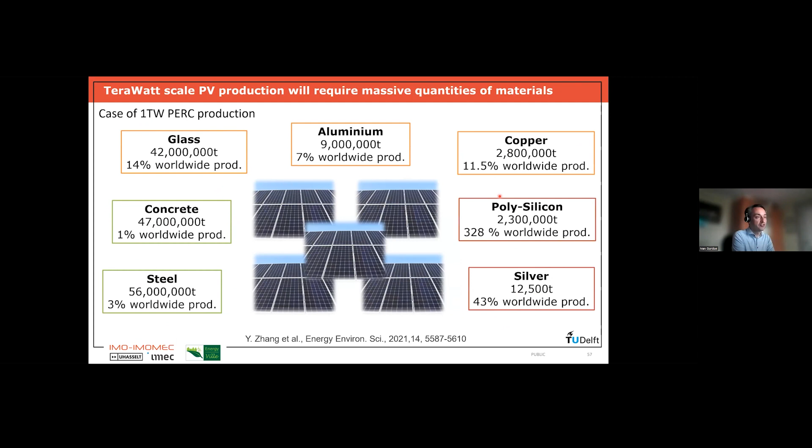So yeah, these become really mind-blowing numbers if you see what is needed, and this is really potentially a problem. If we look into these materials in more detail, we have copper, aluminum, glass, steel, and concrete. Yes, we need a lot of materials in volume, but actually these are not showstoppers. There is enough material there for us to produce this 1 terawatt.

If we look to the polysilicon, at the moment most of the silicon that is actually produced worldwide is already used for photovoltaics. Now we know that silicon is a very abundant material, so there is in principle no problem to really upscale the production. It's just a question—there is no material scarcity, it's just a question of having more polysilicon factories, let's call it.

For PERC, we know that we need around 2,000 tons of polysilicon to make 1 gigawatt of PERC modules. So if we have to go to terawatt production, yes, then we need many more factories for polysilicon, but actually this is feasible. So silicon is also not really a critical material.

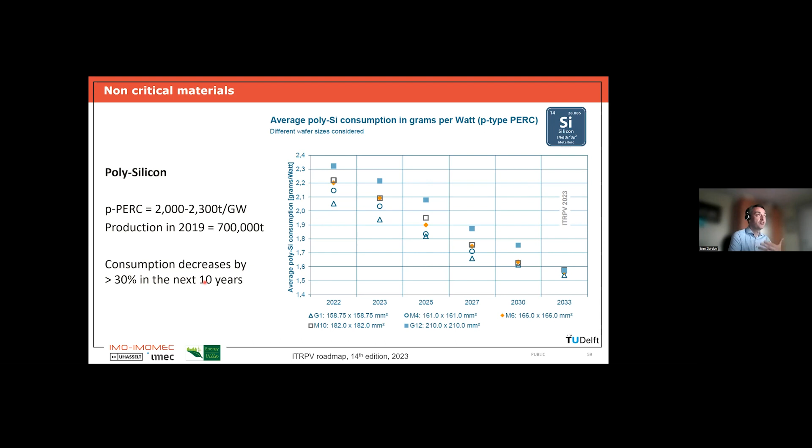Moreover, the industry is still further working on reducing the amount of polysilicon that we need per gigawatt. They predict that the consumption will decrease by 30% in the next 10 years, which is of course also good news from an energy point of view and from a cost point of view.

We also have to assume that we cannot use all the silver being produced worldwide just for PV—that's never going to happen. It would also increase the price of silver enormously, which we cannot afford. So we assume we have a maximum of, let's say, 20% of the worldwide silver that we can ever use for PV production. Then we can calculate: if we have 1 terawatt per year of production, we have a limit of 6 tons of silver that we can use per gigawatt.

If we want to produce 3 terawatts per year, then of course this is lowered by a factor of 3, and it's only 2 tons of silver per gigawatt.

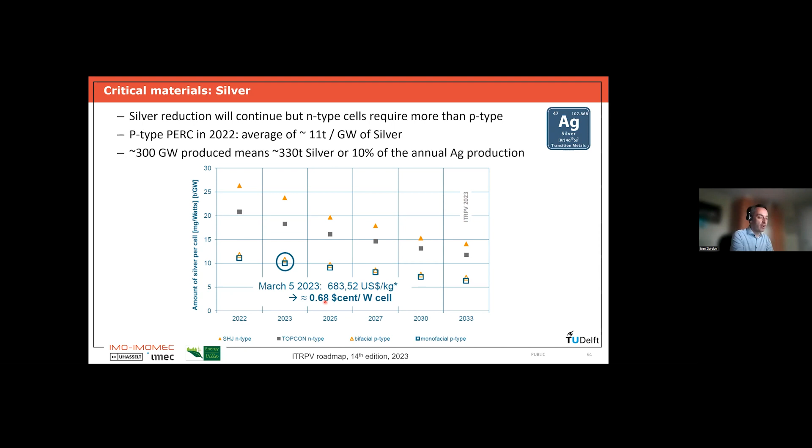So that means silver is about 2 or 3% of the total cost of the PV module. We've seen 40% of the cost is silicon, and 3% is silver. So silver is also quite costly, and we cannot really increase its price too much, or we run into problems.

So the main message today is that silicon PV technology, considered by many a very mature technology because it's produced in very large quantities and leads to the lowest cost of electricity, is still not ready for the sustainable massive deployment we need for the future. We still need a lot of work on materials. I focused on silver, but the same is true for indium and bismuth consumption. We are still far above what we can afford if we want terawatt production.

That makes it very important that we recycle all the modules 100%, not just for the environment, but because we really need the materials inside to produce future PV modules. There is still lots of work to be done to become compatible with the multi-terawatt market, especially reducing the amount of silver and indium we use. We should really try to get indium-free TCOs working properly. This is very important for tandem concepts.

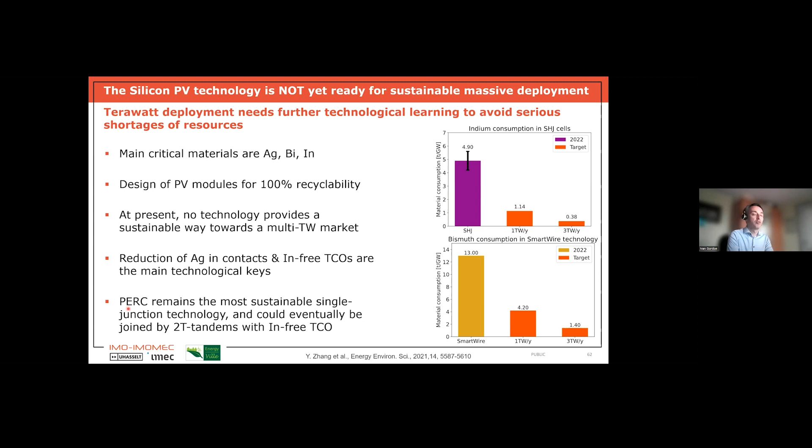Although the industry predicts that PERC solar cells will at some point be replaced in production by TOPCon and/or silicon heterojunction, it's possible we'll have to keep producing PERC for much longer, because PERC at the moment is the most sustainable technology we have. From a sustainability point of view, PERC is actually doing better than the others.

So this brings me to the summary of my presentation. In 2022 we had a small party, I would say — we surpassed a milestone: we've now installed more than 1 terawatt of PV. This is really nice.

We see that single junction silicon solar cells are nearing their practical limit, and we will need to go at some point to silicon-based tandems to surpass this limit and, in the long run, reach efficiencies above 30% in mass production.

Now this 1 terawatt is nice, but we probably need 50 times more in 30 years from now. To do that, we really have to ramp up mass production of silicon PV modules. But doing that sustainably will still require a lot of R&D work. It should be doable — we just have to be aware of it and focus on this.

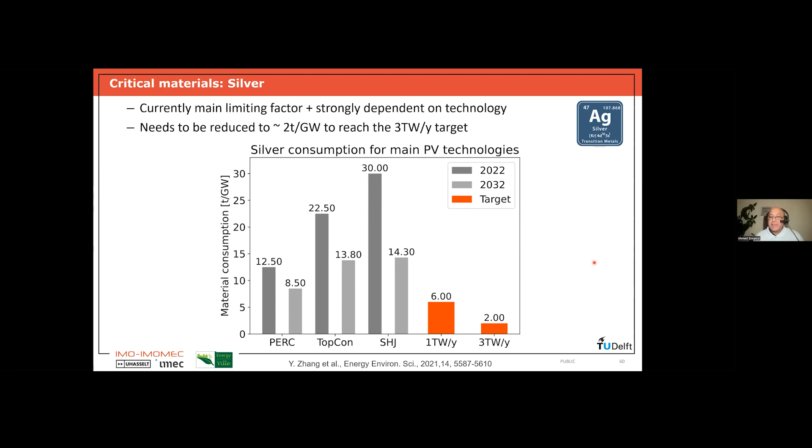The side question from Qassu asked about EVA, ethylene vinyl acetate encapsulation, and whether it's good for a perovskite solar cell.

EVA is also used less today for silicon than in the past, so there are lots of alternatives being developed, because even in silicon we sometimes have problems with EVA, like discoloration. I'm not an expert on encapsulation of perovskite solar cells. I know that at the moment we still haven't found the right material to properly do it. So probably it won't be EVA, but I can't really say what it will be in the end.

Hisham Sharifi asked about how thick and large bulk silicon-based solar cells are, and said what we gain on one side we lose on the other side. I don't fully understand the end of the sentence, but let me try to answer.

Solar cells typically made now in the industry are roughly 180 micrometers thick. The idea has always been to go to thinner and thinner wafers to save silicon, but because we're moving to larger wafers, we still have to make sure they're mechanically stable. That's why wafer thickness hasn't really decreased in recent years, it's typically still around 180 micrometers.

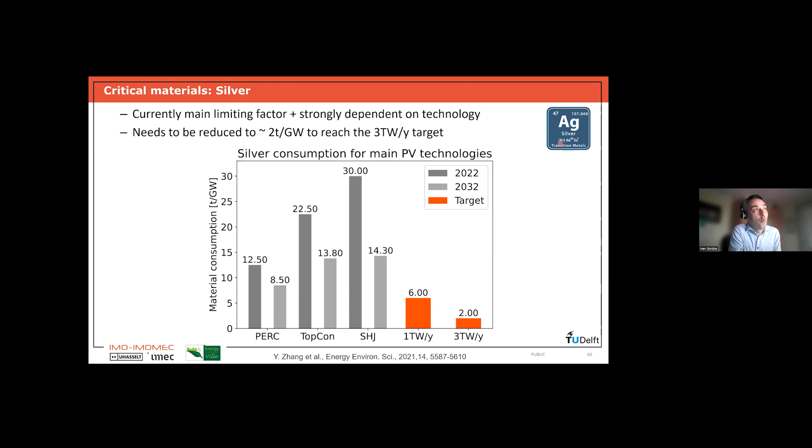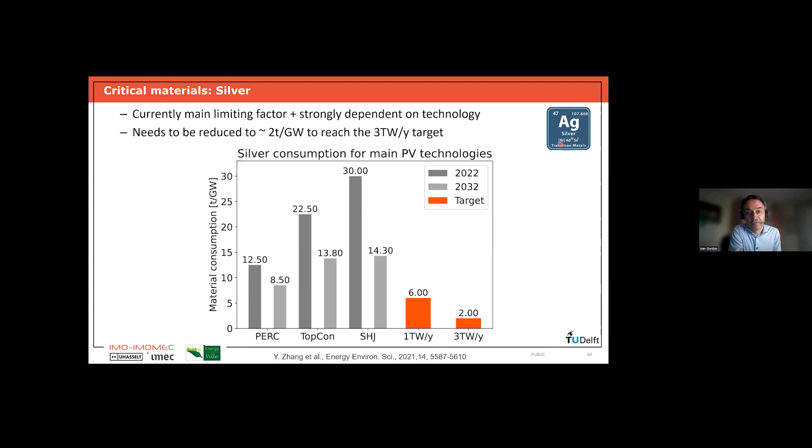In fact, it's even worse than what you say, because I think if you are in the business of producing PV modules, it's very, very difficult to earn a profit. Whereas in the car industry, for instance, it's much easier. But if you think about it, PV modules and making batteries and so on, that's really crucial for our survival. So if this should be a business where you should be able to make money, but it's not the case. Economics doesn't often make sense, because the businesses where you can make the most money are actually things that we don't really need, luxury goods and so on. And the bare essentials, there it's really a struggle to make money, and it needs to be sometimes supported by government and so on. And that's really strange, because we focus on the wrong things. We give money to the wrong things, indeed.